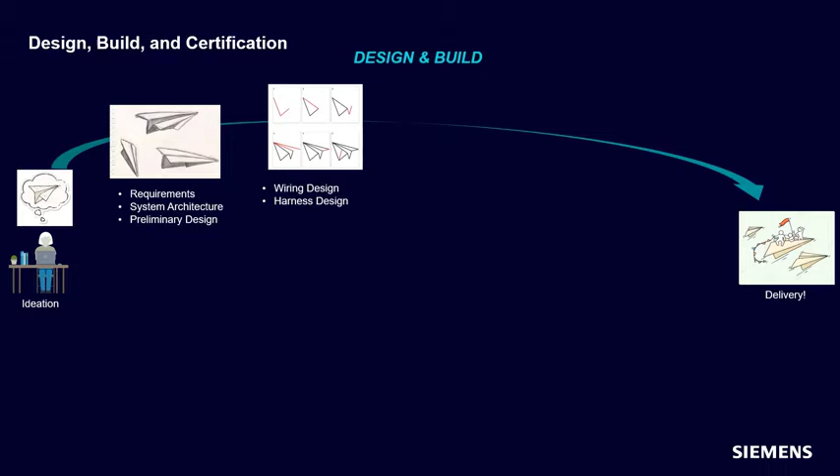To orient us on our discussion today, let's start by taking a high-level look at the design, build, and certification process. As we set out to develop or customize products for a given market, we start with an idea and the goal to build and deliver the product. Most of us tend to think about the design process, which in simple terms begins with requirements definition, architecture, and preliminary design. As the design matures, we move into detailed design of wiring, harnesses, and installations. This then moves into procurement, fabrication, and final assembly.

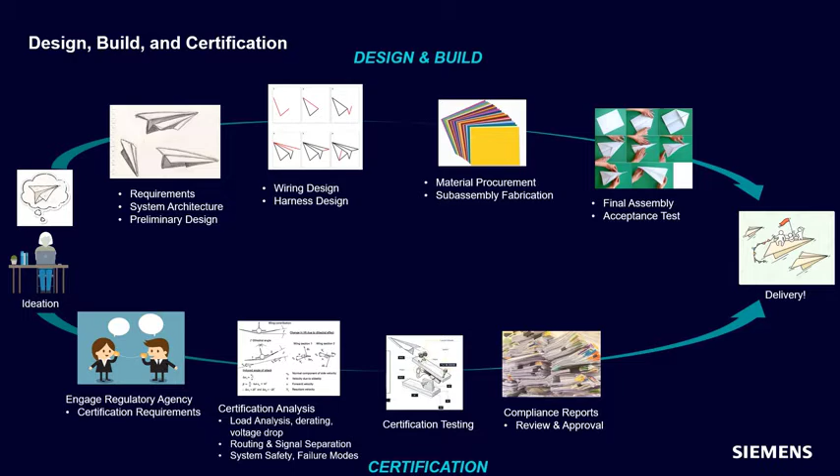We know there's a requirement to certify the product design, and this process flows alongside the design process. Certification begins with engagement of the regulatory agencies to establish requirements. As the design is maturing, we perform analysis and conduct testing to show the design meets regulations and generate numerous reports. Following final review and approval by the regulatory agency, we receive type certification of the design.

However, the reality is not so smooth and simple. Historically, the engineering approach has included some basic analysis during the engineering design, but full and comprehensive certification analysis happens after engineering release when material procurement and fabrication is already underway.

There is a gap here in that analysis is usually done with disconnected tools such as Excel spreadsheets, MATLAB, or in-house developed programs, which require manual review of the data, manual data input, and review and verification.

When analysis finds deficiency in the design, a design change is required. This creates a ripple effect through the procurement and manufacturing flow, as well as an iteration in the analysis and reports. Even worse, if something is missed during the analysis process, it will be found during certification review. This creates a critical situation for an urgent design correction and likely rework to already manufactured product. This separation between design activity and analysis activity is one of the critical gaps in the certification process.

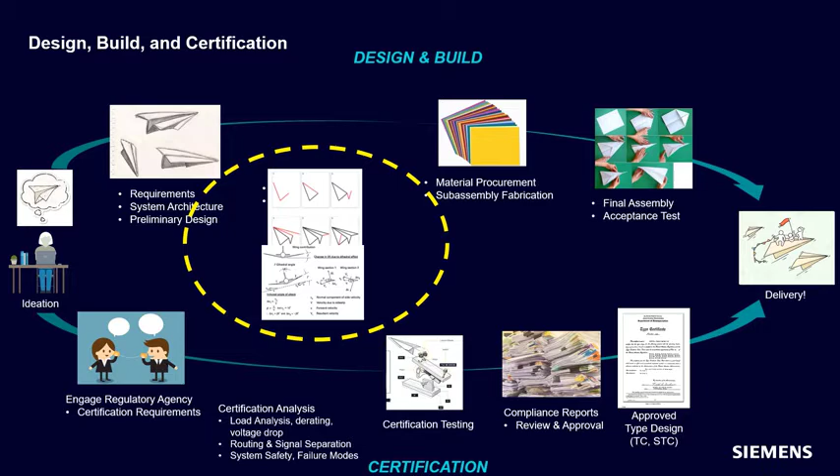One way we address this at Siemens is to digitally integrate analysis tools with the design tools. Integrating design tools with analysis tools starts with the configuration-controlled digital twin to provide accurate information describing each product configuration. Remember, the digital twin is more than just engineering in CAD. It is a true model-based digital representation of the product design.

Using the digital twin, we can create compliant designs of the electrical system from the beginning by using rule-based verification and constraint-driven design. Automation enables continuous validation of design compliance by interrogating an authoritative model of the product's electrical system. This allows design and analysis engineers to check, analyze, and integrate the design and address concerns immediately.

Now I'm going to hand this over to Colt and Madison to show some examples of what can be done.

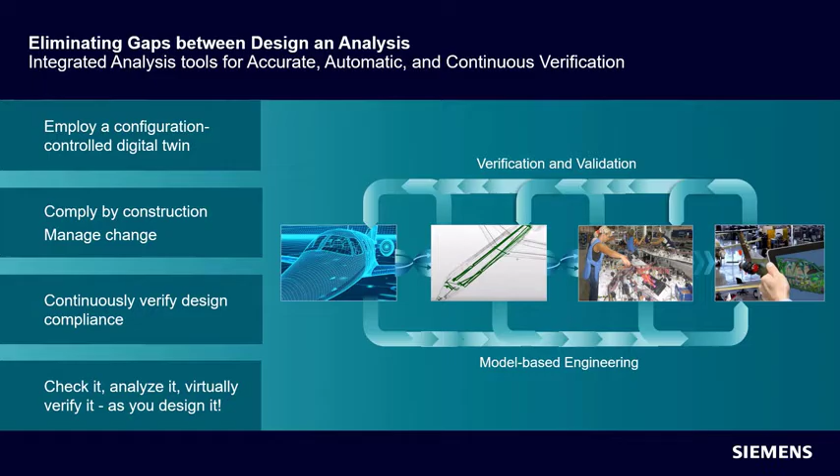So let's take a look at how we can accelerate certification using Capital. When we think about compliance requirements, we're really thinking about a couple different things here, one of them being electrical load analysis, and the other being EWIS requirements.

Now with Capital, we can complete electrical load analysis early on in the program. It frees engineers for other tasks. It's going to help drive correct-by-design construction by using live data and leveraging information that we've already input into our design process.

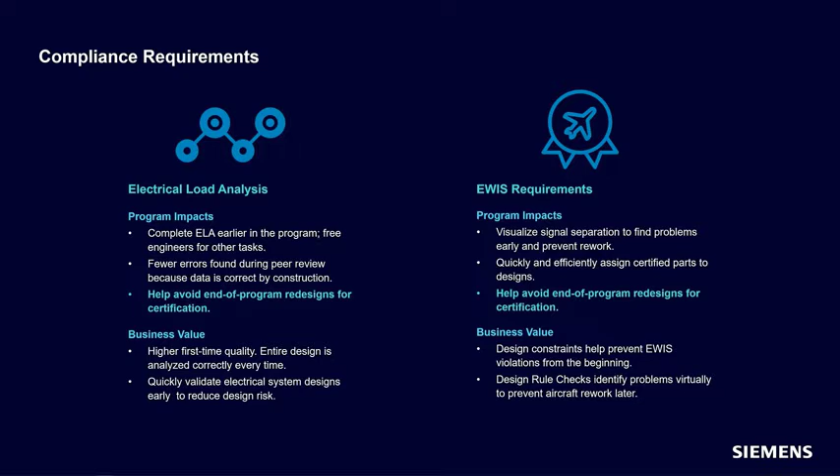And then for EWIS requirements, we're going to be able to drive signal separation through some design rules and constraints and prevent rework at the end of the program, and help avoid end-of-program redesigns for certification. So we'll also be able to do things like drive certified parts into our designs for the entire vehicle platform all at once.

So when we take a look at electrical load analysis, let's go ahead and look at the traditional load analysis method. Typically, you'd have somebody who would manually go out and collect information from designs, take that information, load it into a spreadsheet in something like Excel or some other kind of homegrown database.

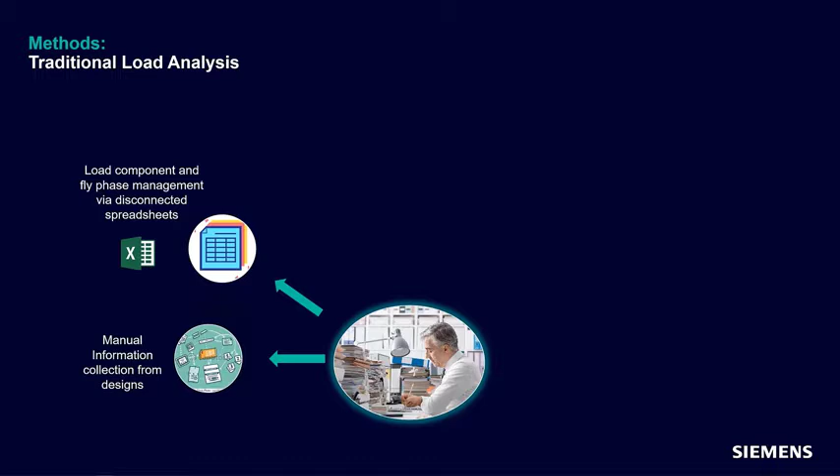They would then take that information and lay out a visual representation of the power architecture through what we call the single line wiring bus diagram. Typically, this is done in something like Visio or some other kind of drafting tool.

Once all that information is done, then the engineer can run bus and source load analysis. Usually this is done via some kind of macros or equations all loaded into your Excel spreadsheet and so forth.

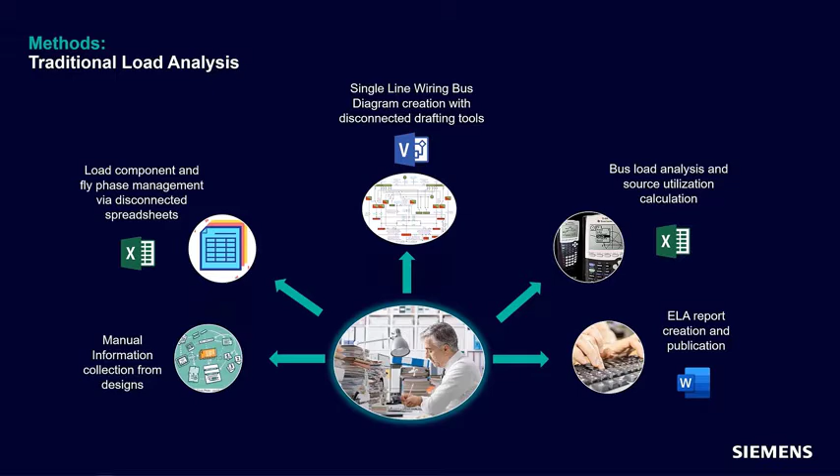And then once you've verified the analysis looks correct, an engineer can go ahead and create some kind of publication in either a Word document, or it can be an exportable macro from Excel or some kind of other PDF editor. And what it ultimately leads to is a very labor-intensive process. It's very error-prone because you're looking at dual or triple or maybe even quadruple documentation. It's late-stage analysis. This is more of a batch process done at the end, and it's all very manual.

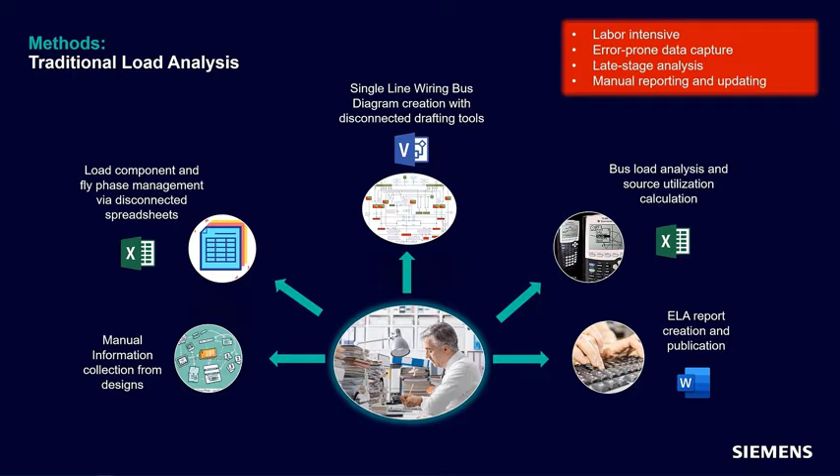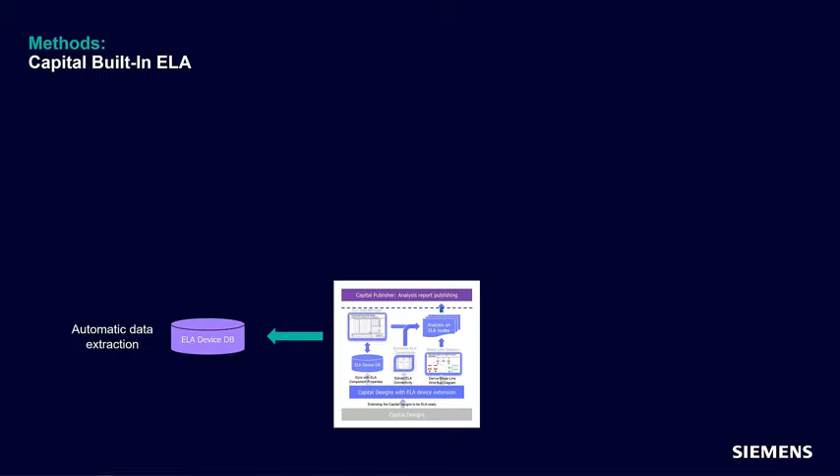So then all these tools are disconnected. So what we want to be able to provide is something a little more automated. We want to extract the data that's already being put into a program and reuse it.

So what we're offering with Capital is you're already doing all this design in what we call Logic. You're doing all your wiring design, your schematic design, your block diagram, and all that stuff. And we want to just reuse that information, and we want to stay connected and be able to run analysis live.

And then we also want to be able to create our single line wiring diagram in the same environment and reusing those same live parts. And that is something that Capital Logic will allow us to do.

We'll also be able to run on-demand load and source analysis inside Capital via the ribbon and the ELA license. So we'll be able to do things like bus load analysis, source utilization analysis, battery analysis, all on the fly at any time during the design process.

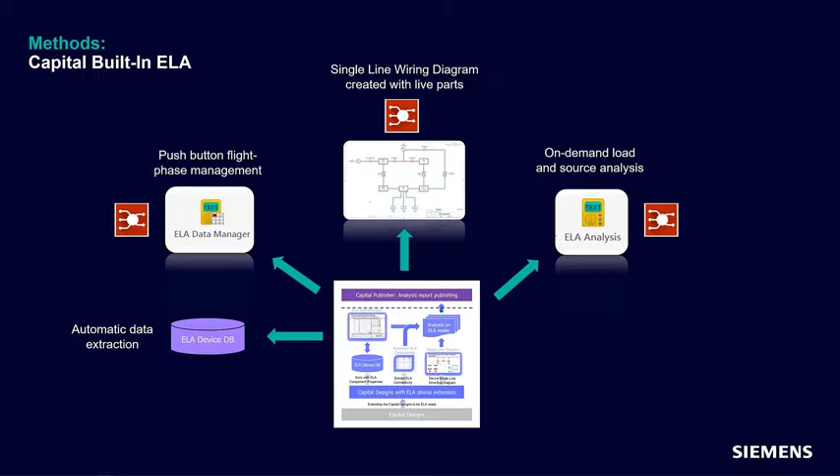So this will really eliminate end-of-design risk and program scheduling issues. And then also in Capital, we have another tool inside the suite, which is a publications tool. So we'll be able to do on-demand report generation with live data, and we can build this report out as we go.

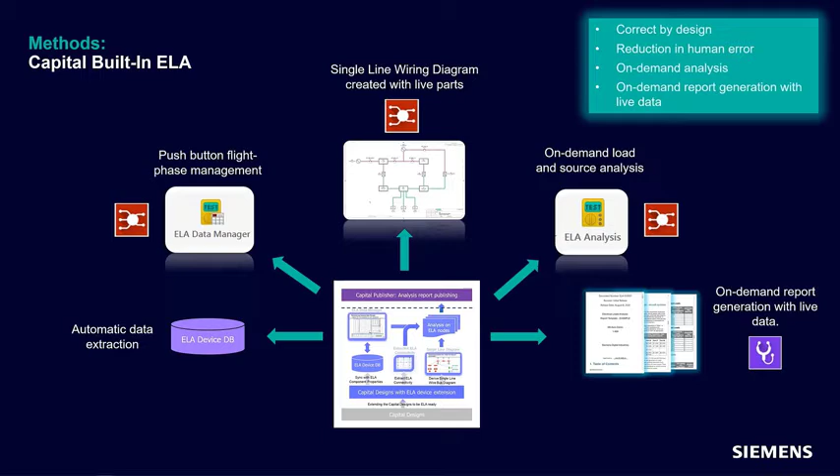Ultimately, what it leads to is a correct-by-design philosophy. You're going to have a reduction in human error because you're not double or triple documenting the same thing over and over. You're going to be able to leverage on-demand analysis and on-demand report generation.

So the ELA data flow inside Capital will look like this. First, you're going to have what's called configuration management. You want to be able to run your analysis tools on a particular tail number or configuration, and we can do that through scoping and build lists inside of Capital.

We'll then go ahead and create our single line diagram by reusing existing devices and components inside of Capital that we've already loaded into our wiring designs. We can then do some data management through the built-in GUI for the ELA tool itself.

We can enter in different parameters for the loads, for the power sources. We can also define the flight schedule for the plane, G1 through G5, G1 through G10, whatever that is - engine startup, taxiing, cruising, takeoff and landing, and all that stuff.

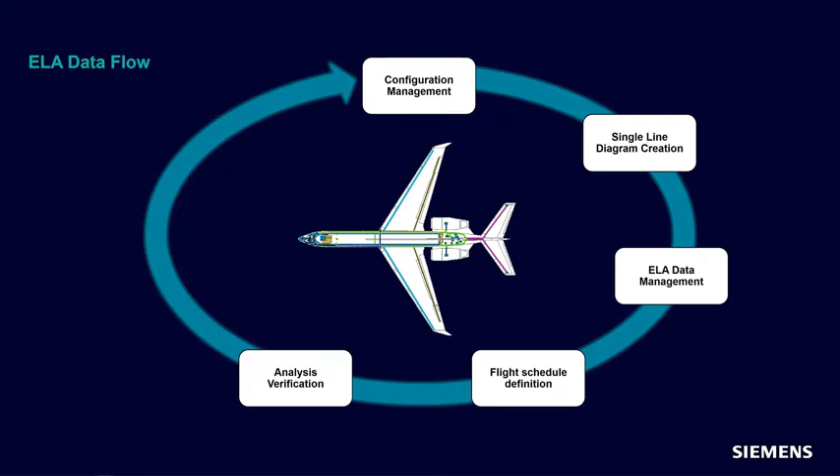We can then run analysis verification on all our buses or all of our sources, and make sure that we're getting the numbers that we're expecting. Then we can do some report authoring through the ELA report builder inside of Capital Logic, so you'll be able to adjust the look and feel of your actual output report. And then we can publish through Capital Publisher and actually spit out a report in seconds or even minutes.

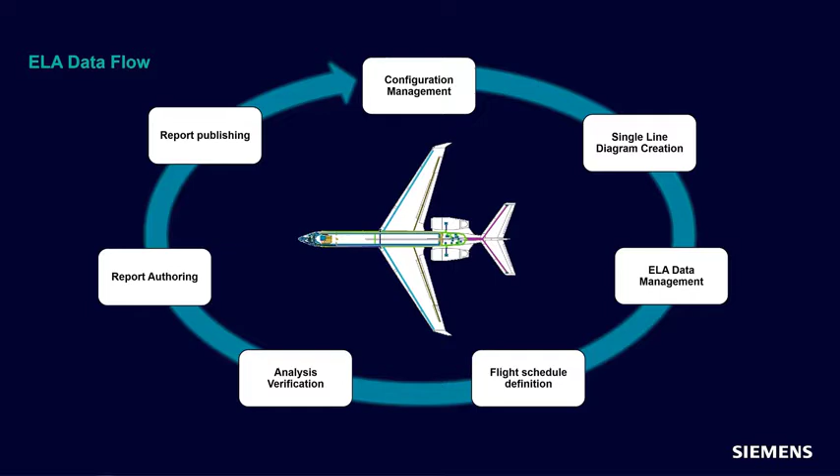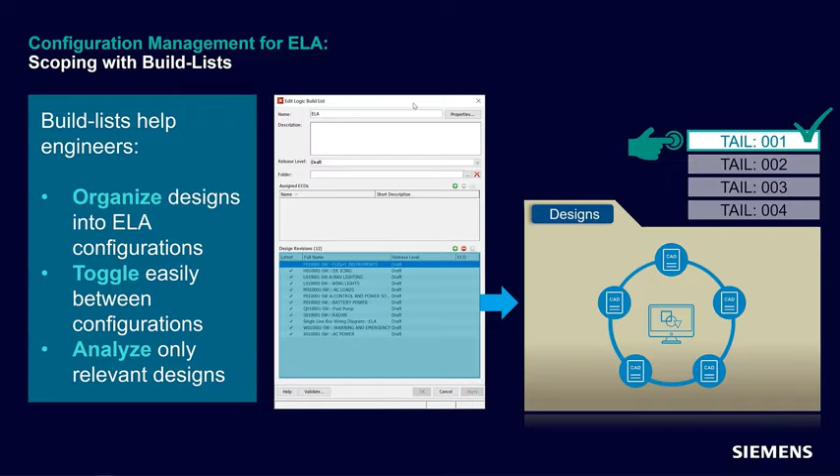So when we look at configuration management specifically for ELA, we do scoping through what we call build lists. All it is, is a collection of designs with relation to a specific configuration or tail number. It's going to help the engineer organize designs into different configurations. You can easily toggle between different tails and choose which ones you want to analyze. It makes it really easy for the user and so forth.

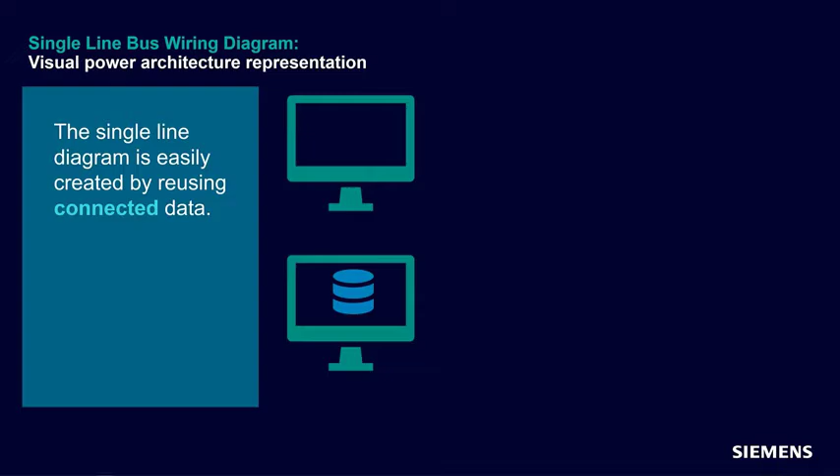So then once we have our build list set, or our scope, we can go in and create this single line bus wiring diagram. All it is, is a visual power architecture representation. And so what we're able to do is reuse the data that's already been input into our wiring designs, or what we call our underlying designs.

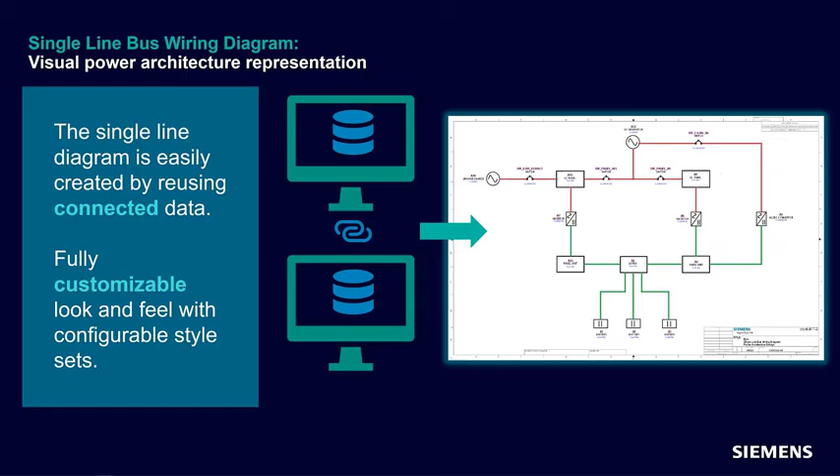So our power architecture is going to consist of our power sources, our buses, our switching architecture, batteries, and we don't need to show our loads or anything in here because that's all connected through the build list management, the collection of designs. And this is fully customizable - the look and feel of it can be totally whatever the user wants it to be. In this particular example, we're showing AC in red, DC in green, and so forth.

Now, the data management is also very easy inside of this tool. So at the click of a button, we can pull up this data manager. And what this is going to allow is the user to input different parameters for different sources, for different loads. You're going to be able to edit the flight schedule, and edit which loads are on during different flight phases and so forth.

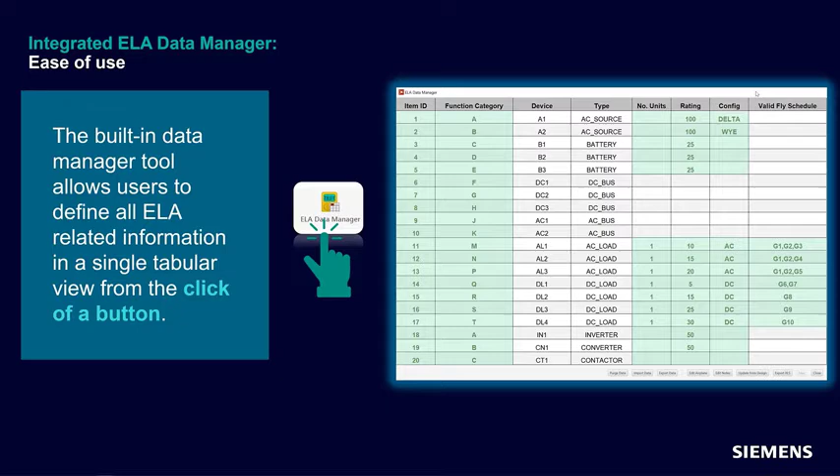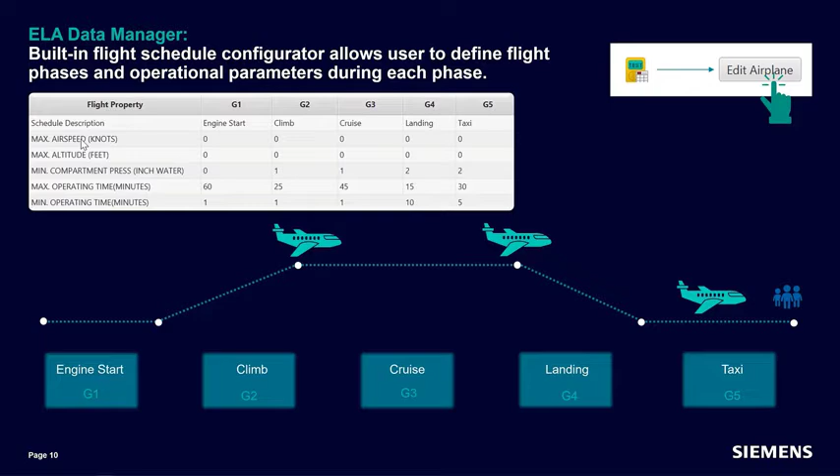So if you look back here, you have this button down there called Edit Airplane. And what it's going to allow the user to do is define different flight phases for the particular aircraft. This one's going to have an engine start, a climb, a cruise, landing, and then a taxi phase. Through the push of the button, you're going to get this, and you can edit different parameters within each flight phase as well, as far as airspeed, altitude, and so forth.

Once you have your flight schedule defined, you can go further and define different types of loads that are turned on during that flight schedule.

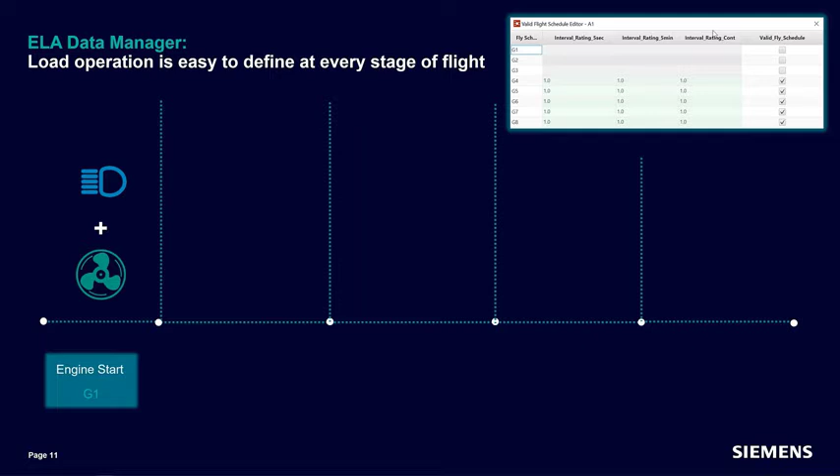So let's say during G1, the engine start, we have our turbine and lights going. Then maybe when we move into our climb phase, we turn on some music, and then we go into cruise, and we also turn our radar on. Once we come back into our landing phase, we turn the music off, and during taxi, we can go ahead and kick our radar off.

You can define all these different parameters within the flight schedule editor just by putting a check mark during which flight phase they're turned on, and then you can adjust their ratings at different intervals. The different intervals are 5 seconds, 5 minutes, and continuous power.

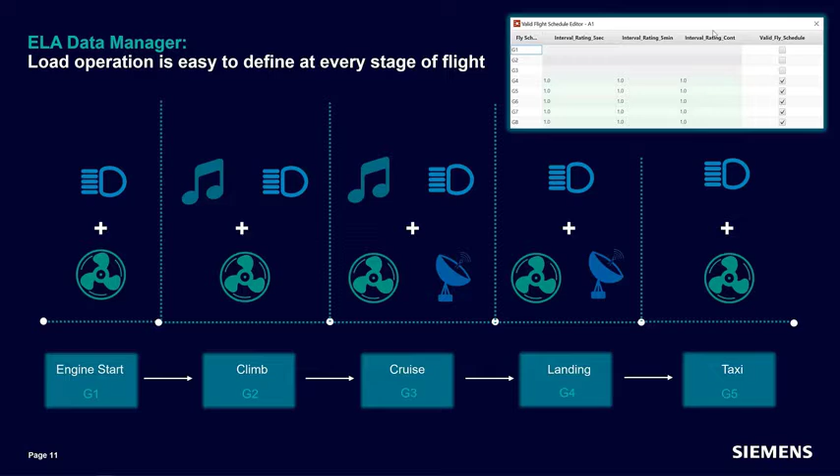Now, after we do our data management, we can go and run analysis verification also at the click of a button anytime in the design process. Depending on which type of component you have highlighted when you run this analysis, Capital will know if you want to run source utilization or bus load analysis or maybe battery analysis.

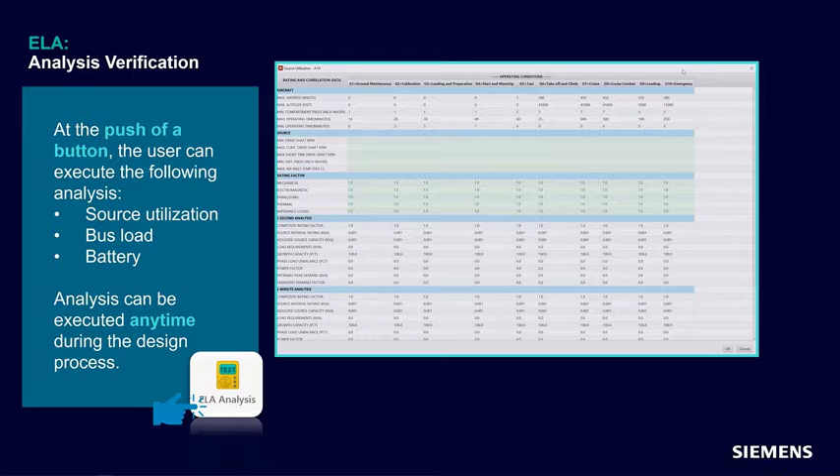This is an example of what source utilization analysis would look like. Again, everything in green is editable, so a user can come in here and define shaft RPM and stuff like that at different flight phases and see the effects of that change.

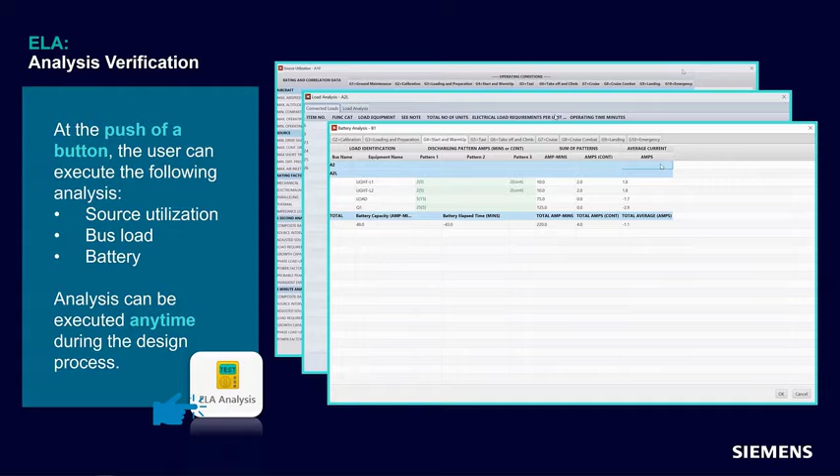And in here, you can define different discharging patterns for loads at different flight phases. We'll take a little bit more look at that.

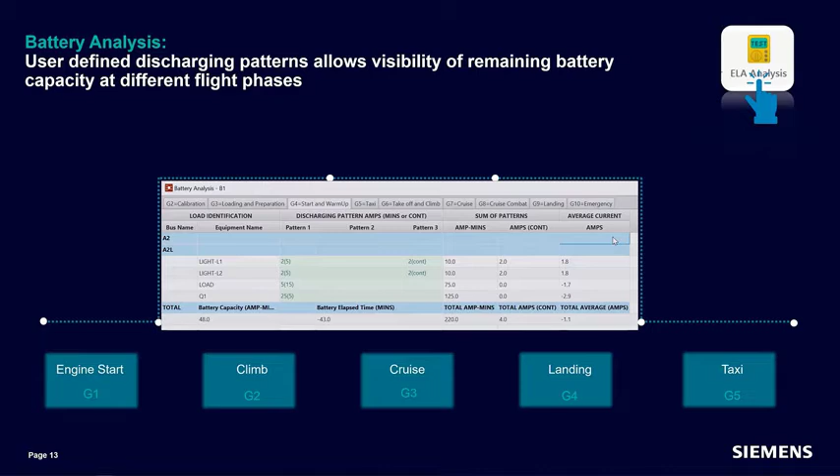So by running analysis on a battery, you're going to get this menu. Again, everything in green is editable, so you can go in here and edit discharging patterns for loads. Once you do all of that, you'll be able to see your battery capacity at different flight phases, depending on the loads and their discharging patterns.

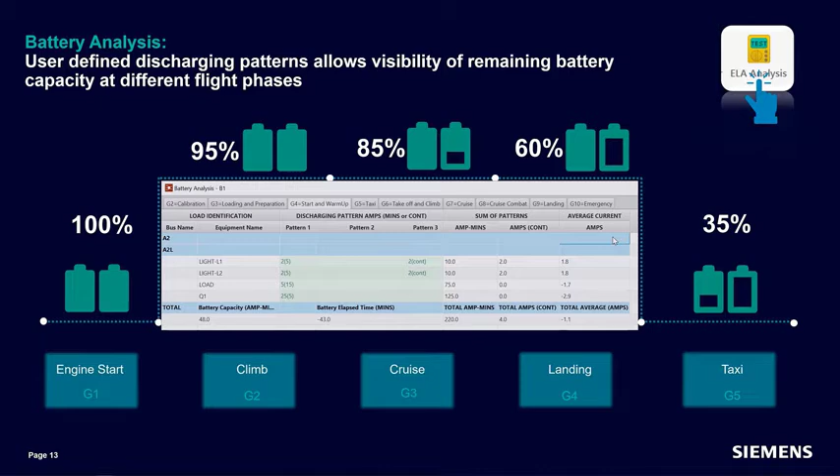And it's very visually easy to see. So now that we've gone ahead and verified our analysis, everything looks the way we want it to. We want to go ahead and create a report.

But basically, with tagging, what we're doing is we're leveraging live data again, so that we don't have to manually come back in and update that later.

Also, with a report builder, once you get the look and feel you think you like, you can export that template and save it off in a local directory somewhere. You can pull that template back in at any time. You can pull in just individual chapters of a template as well.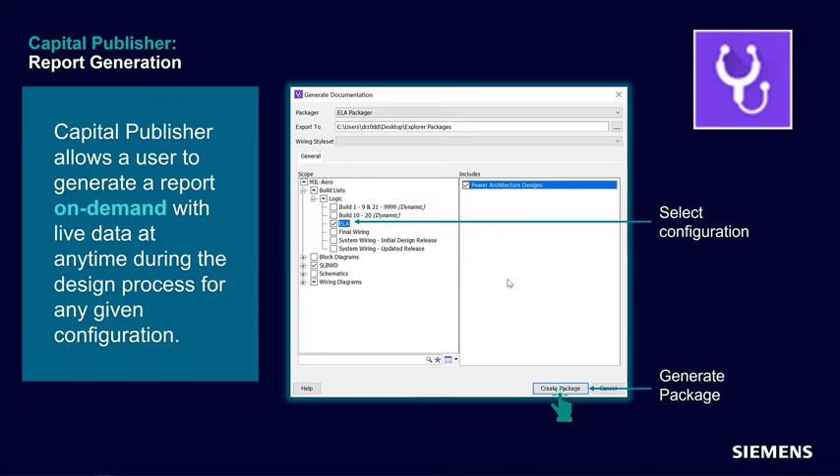We can open this. We can select our ELA packager, select our scope or our configuration or our tail number. And then all we do is hit create package. It's very simple, you click the button.

And it spits out a report based on your template that you have set. So in here you see that we're automatically pulling in our document number or revision, our release date. All that information is live and it belongs to the designs themselves, so we're not coming in here and manually selecting and retyping anything at all.

Another thing we want to talk about is EWIS compliance and how we can use Capital to drive some of those requirements. We have a tool called Topology that provides a top-level view of our vehicle. In here we have this helicopter, and we can define some rules and constraints. Rules are just a collection of constraints.

In this particular example, we're defining along certain route paths: do not route conductors with an EMC category of FC or data. And on another bundle route, we don't want to route anything that is secondary, so we want to keep that to primary only.

We can use this tool to do automatic routing based on requirements set by the user. We apply these constraints, and Capital will automatically route everything based on the rules set forth by the user. It'll route primary and secondary individually and separately, and it'll also separate different EMC categories defined by the user. So it's a very quick, very efficient way of doing it.

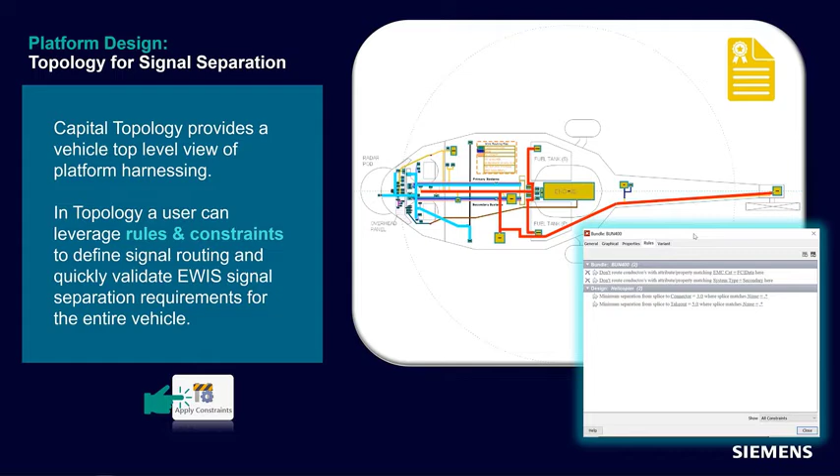Vehicle-wide harnessing. We can also drive certified parts, so we always want to ensure we're using certified parts to comply with EWIS and the FAA. In this example, we're going to drive some part numbers based on FAR Part 25 rules, and we're going to drive some wire specs based on that rule. So if we have different EMC categories, use this part number. If we have flight controls or DC, ground DC, or data, then use so-and-so part number.

We can set those rules up, and then all we have to do is apply our constraints, and it will literally apply that rule to everything on the entire platform. But you can also run this at the design level as well, so if you don't want to override anything that somebody else has done, if you have multiple users working on different designs, they can run these rules and constraints on their designs only. This helps you validate EWIS compliance early in your design lifecycle, so you don't have to worry about it at the end to ensure users are using certified parts.

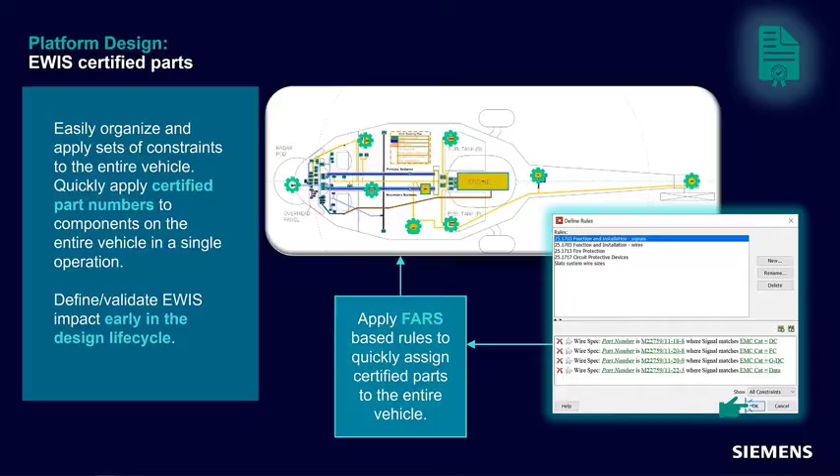As we're all aware, managing configurations of designs and assigning different revisions to certain effectivity ranges can become increasingly complex. With the correct configuration management tools, we can start eliminating this gap. What we're looking at here is a simple example of having 3 designs, each with 2 revisions, and these designs are assigned to 4 different tail numbers.

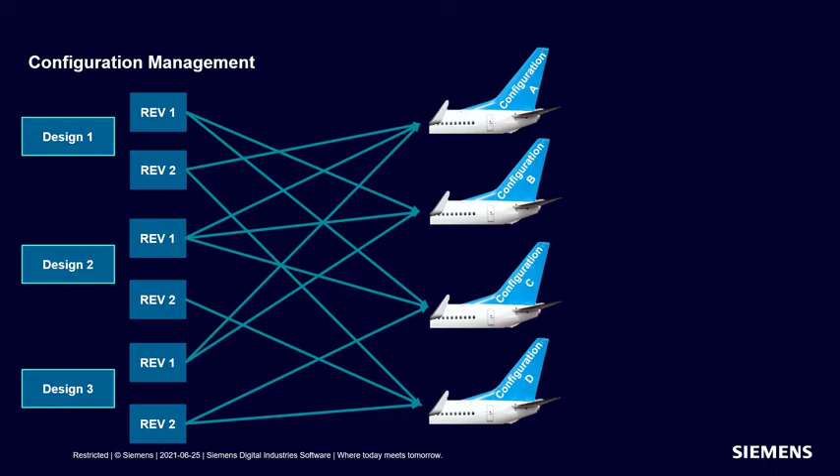However, each tail number is assigned to different configurations of the designs. Imagine now we have 5 to 6 revisions per design on a run of 100 tails. How are you going to tell the FAA what designs were used to produce what tail? In this case, we want to know which designs are applicable to tail C. Before, we'd have to manually track this information and hope we didn't miss a revision or forget to update any configurations. It was a very manual and error-prone process.

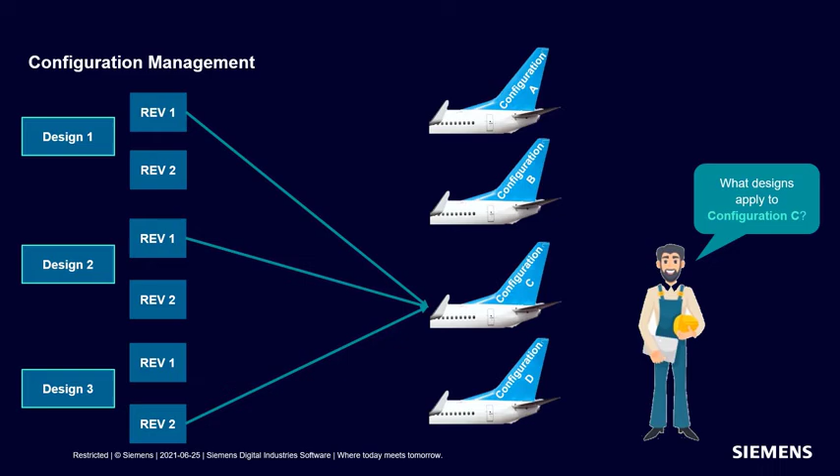Now we can automatically track configurations, and we can choose which tail or effectivity range we're interested in, and all applicable designs will be pulled for us.

We can take another look at this concept, but in terms of design revisions versus tail numbers. Here we have one design with 4 different revisions, and each of these revisions is tied to a different series of tail numbers. Instead of looking at which designs belong to each tail, we have the ability to view all of the tails applicable to a single design revision.

It's important to note here that even if we're changing the effectivity range of a certain design revision, we're not actually making any changes to that design itself. This provides us an interactive way to view, edit, and verify that each revision is correctly applied to a tail number. So simply put, Capital provides automatic identification of unique configurations based on effectivity.

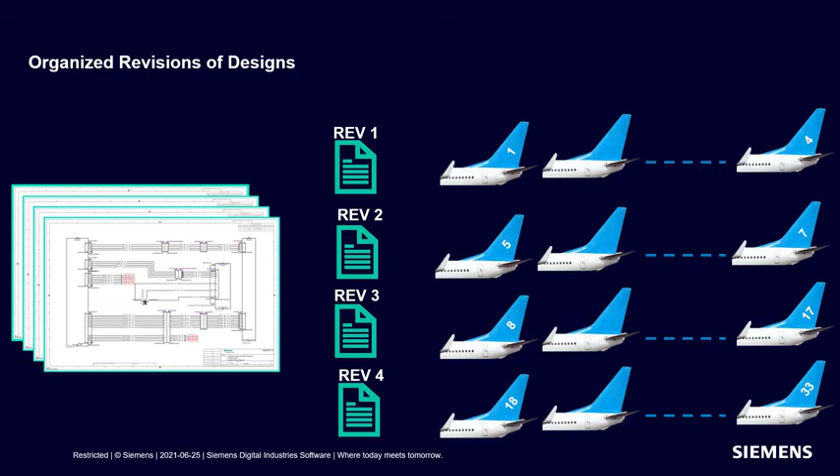Although Colt touched base on the use of build lists earlier in terms of ELA configurations, we're going to look at the power of a build list in relation to aircraft builds. A typical aircraft will be made up of several key systems, each containing hundreds of lower-level designs.

The method used to organize this design content is through build lists. These build lists identify a number of designs that are used to construct any given build. This could be a subsystem, a major system, or even an entire aircraft. As revisions are added, Capital automatically tracks which effectivity level the revision is applicable to, which ensures correct application of designs, eliminating any gaps in managing configurations.

So let's say, for example, we need to pull all designs for tail 001. We can create a build list, assign it an effectivity of 001, and then all of the designs will be pulled for us, and we can report out on that list. So now we're going to pop into the tool itself and see how this works.

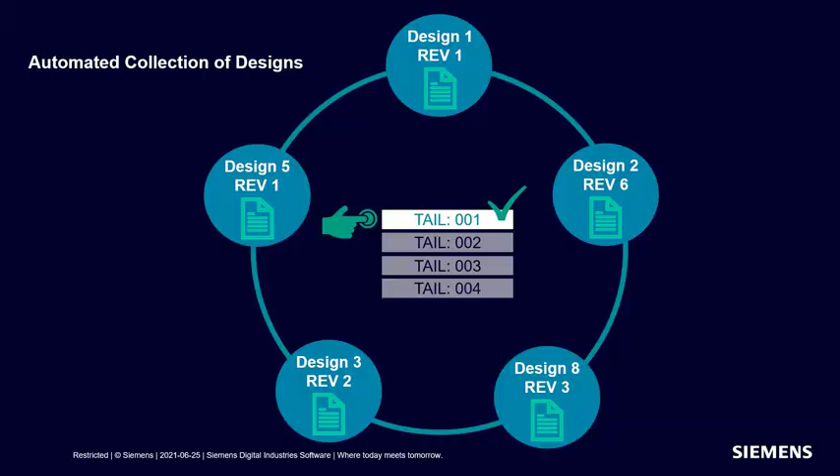As you can see here, we're going to be focusing on wiring design DC power. Within this design, we have two revisions, revision A and revision dash. If we take a look at the effectivity assigned to revision dash, we notice that it is applicable to build S41 as well as S476 through 9,999.

Popping into revision A, we can do the same thing. We notice that this effectivity is applicable to tails 2 through 75. We have the ability to go in here and add additional effectivity. So let's say S4 1000 to S4 1001. Changing that effectivity is not actually changing the design itself. We're just adding additional information to that design revision.

In terms of build lists, we can right click and choose create from effectivity. Let's say we are interested in effectivity 70. So we choose that and choose OK. This is going to automatically pull all of the designs that are assigned to the effectivity 70. This eliminates the need to manually go through all of our designs and their revisions to pull the applicable designs for tail number 70.

So with the amount of design changes and increasing complexity, how do we ensure our data is coherent? This is where change management plays a big role. It's typical to have designs change as the aircraft matures. However, there's often a lag time between changes being made and stakeholders understanding what these changes are.

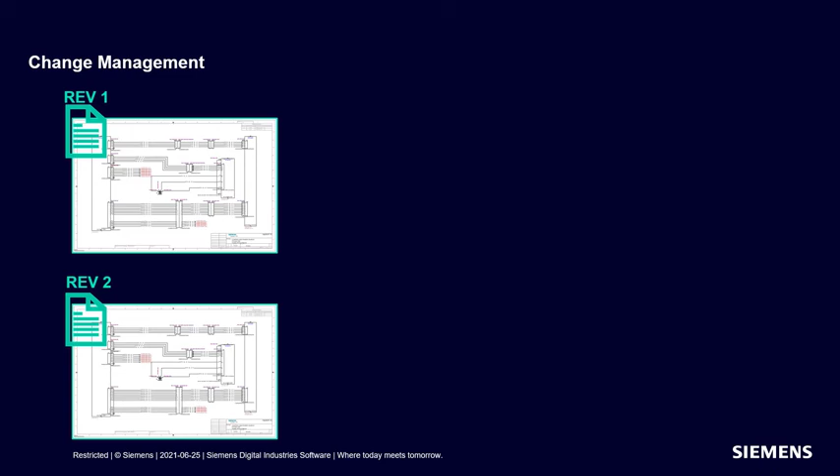For example, we've created a revision 1, but then mechanical comes to us and says that there needs to be rerouting done, so we then create revision 2. As the design is evolving, we want to see what these changes are. So to understand what changes have been made between revisions 1 and 2, we can use the Publisher tool to generate a report. This aids in answering questions such as, what would cause this change to be made and how do I get value out of that information?

Traditionally, we would need to sit down with both designs side by side and decipher any differences. But with Publisher, we can auto-populate the design changes and even make this report available to stakeholders outside of the Capital environment. By validating ECOs, this tool can be used by many teams such as materials, manufacturing, or a DER to accelerate the acceptance process and getting us one step closer to that validation.

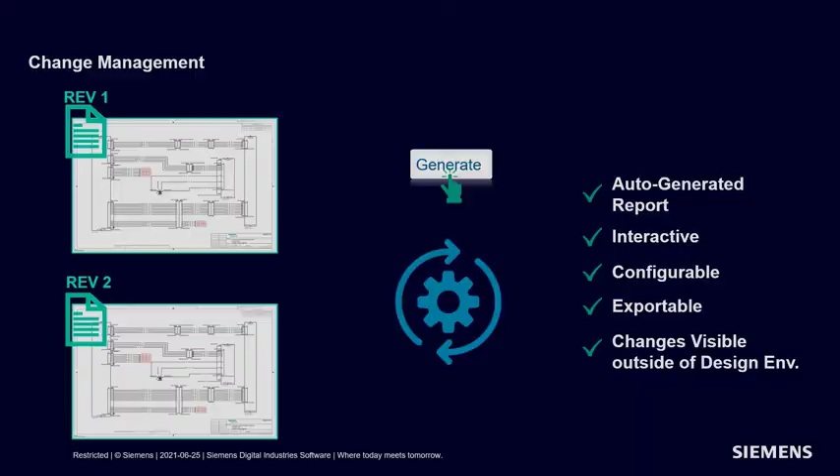So let's take a look at how this works in the tool itself. What we're looking at here is a change illustrator package created from our Capital Publisher tool. We have our revision dash and our revision A, and we can look at what the design changes are between the two. On this left side here, we have different reports which can be configurable and customized.

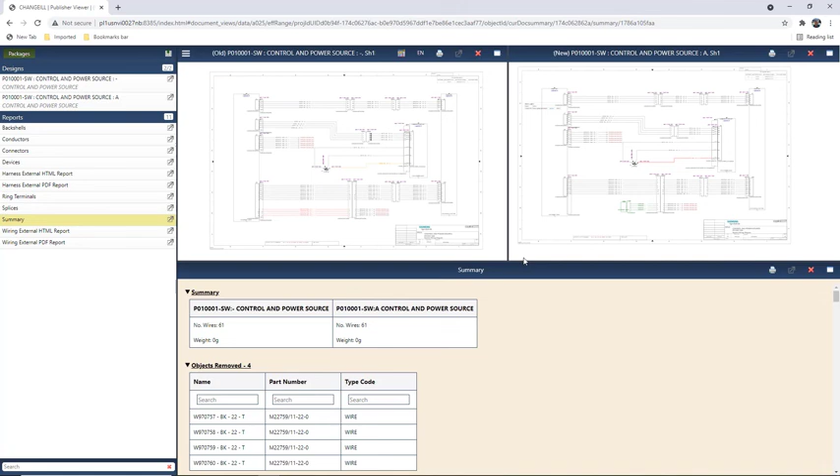So we can start at the summary report here. All of the items in red means that they have been removed, green means that they've been added, and yellow means that they've been modified. If we look under the Objects Removed tab, we can click on these hyperlinks and it directs you to that object. We can also do the same for the objects added. Click on that hyperlink and it will pop you into the object in question.

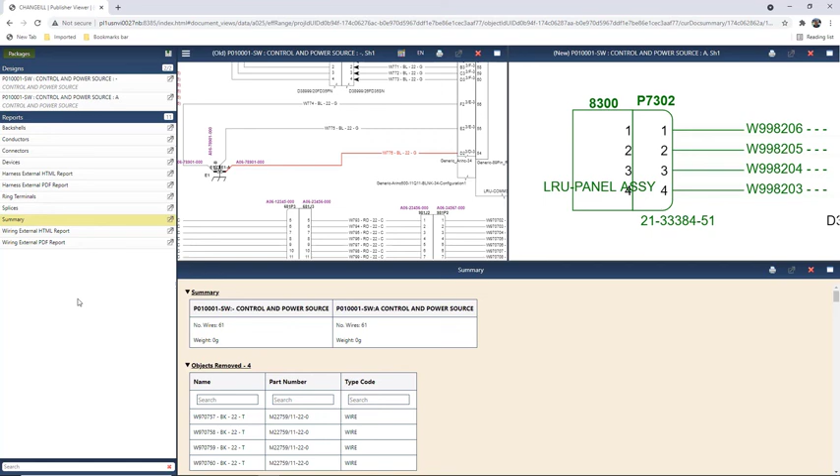In terms of objects modified, these are also hyperlinked, and we can see that the change here has been a part number from a 22-6 to a 24-9. So all of these reports provide us different information on design changes between these two revisions. We also have the ability to export this as an Excel file. What this does is it gives us the ability to send this information to users and stakeholders outside of that Capital design environment.

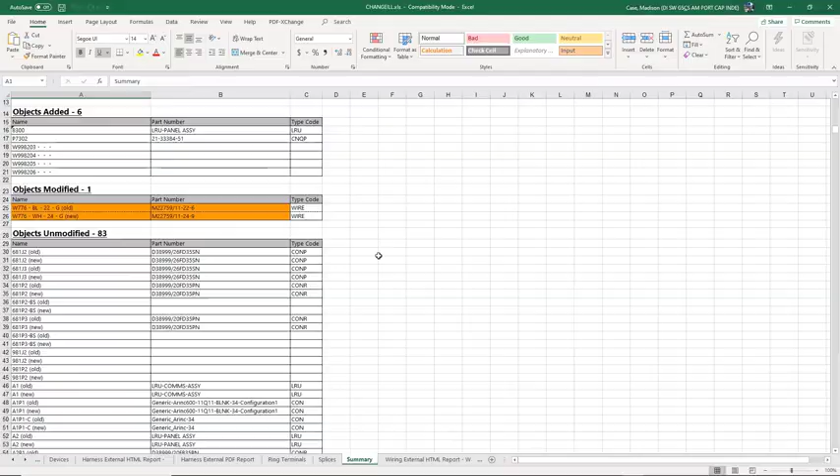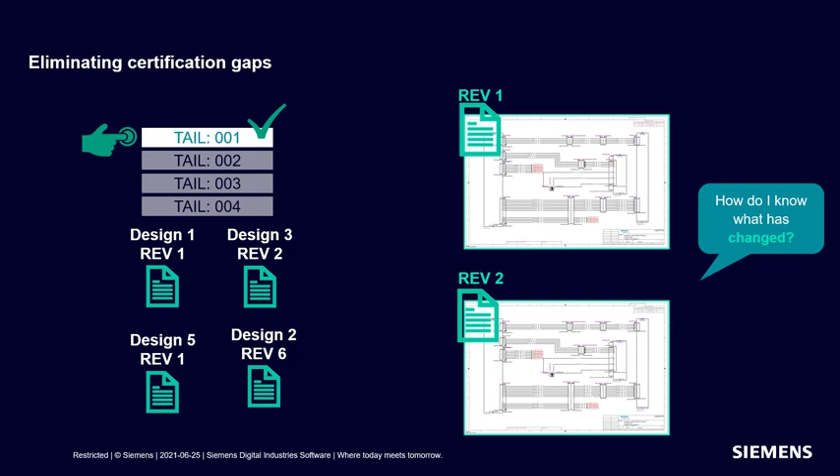Both configuration management and change management play a role in eliminating certification gaps. Through the use of build lists and automated report generation, we have the ability to quickly and accurately report out design changes and the applicability of designs.